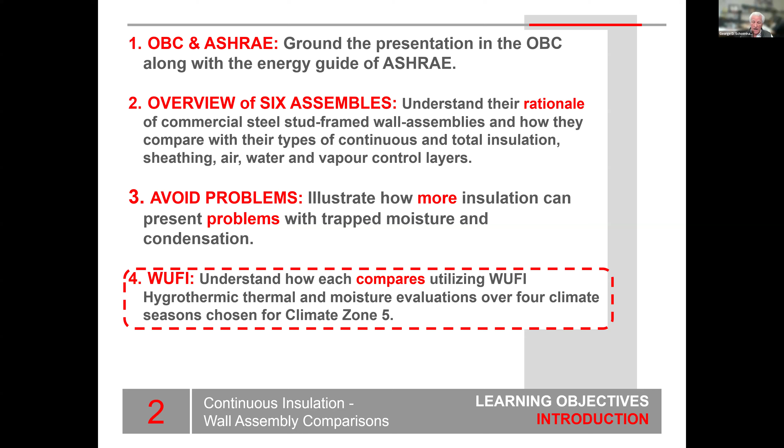We're going to talk about how to avoid some problems. Sometimes putting more insulation can actually become a problem because it traps moisture and it traps condensation, or it creates condensation where you don't want it. And then we're going to take a look at some WUFI models that we did a few years ago comparing the hygrothermic characteristics of the 6 wall types. And they are designed for climate zone 5, which happens to be Toronto.

So with that, here are the 6 walls. And we will come back to this particular view multiple times. So as you see this slide pop up, it'll kind of be the introduction into the next section.

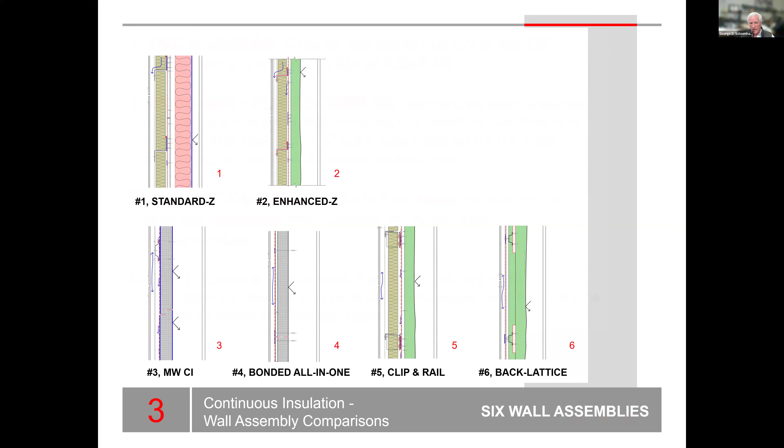So in order to do the comparison, I had to come up with the rules of the game, and figure out what are we comparing to. So here are the rules.

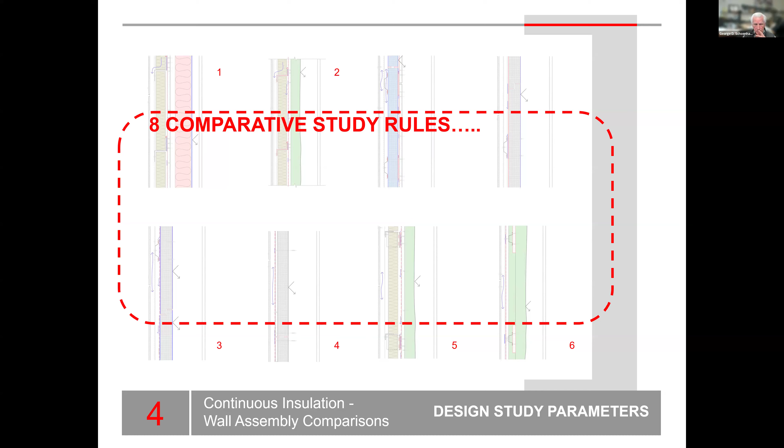We're going to be working with OBC. We're non-combustible, use group C, which could be other use groups, but for this exercise it's use group C, which happens to be residential, and we're sprinklered.

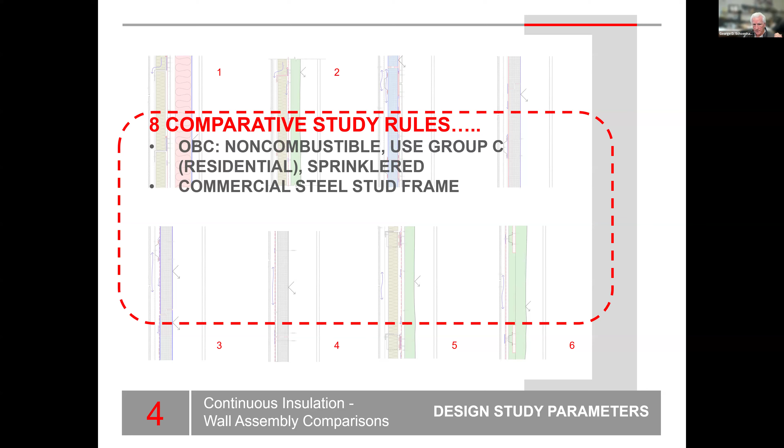We're commercial steel stud. The cladding, and this is interesting, the cladding is independent - that means left, right, independent of where the studs are. So basically where you attach the cladding is not dependent upon where the structural stud is behind it.

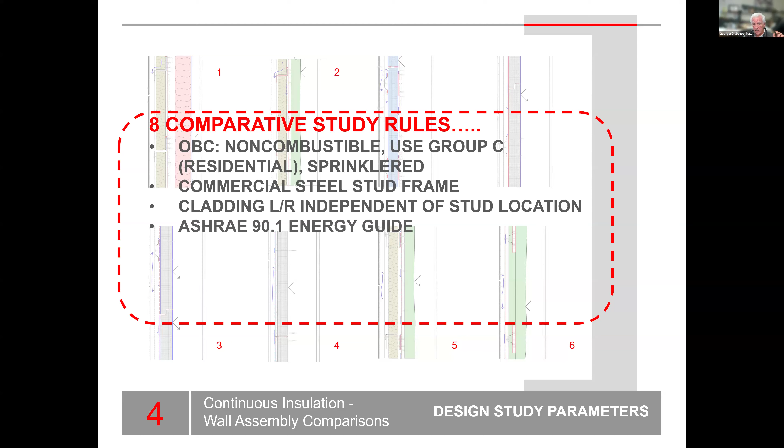We're going to be using ASHRAE 90.1 as our energy guide. We're going to be using climate zone 5. The reason for that is climate zone 5 is the first climate zone that requires vapor control. Any zones less than that are too warm and don't require vapor control. So everything within Canada requires vapor control.

And for the outdoor cladding, we're using 1/4 inch fiber cement. And for the inside, we're using mold resistant drywall.

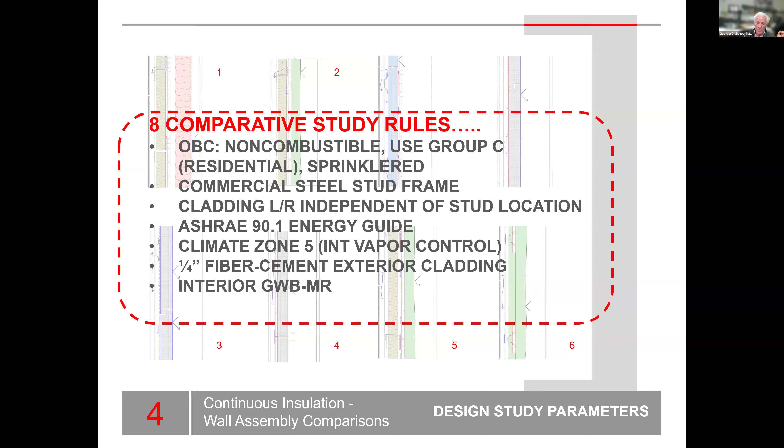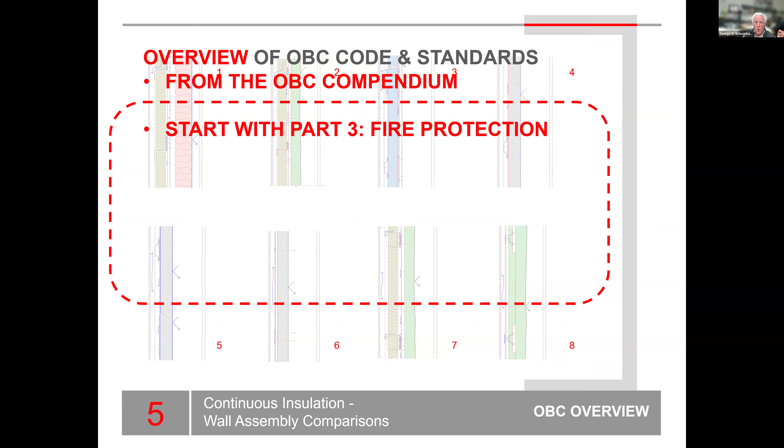Now, from the overview, we're going to take a look at the OBC and only those particular categories and sections of the code that are relevant to what we're working on here. We're going to start by looking at part 3, which is fire protection, and these are the categories we'll be looking at quickly as we go through. Then after that, we're going to take a look at part 5, environmental separation.

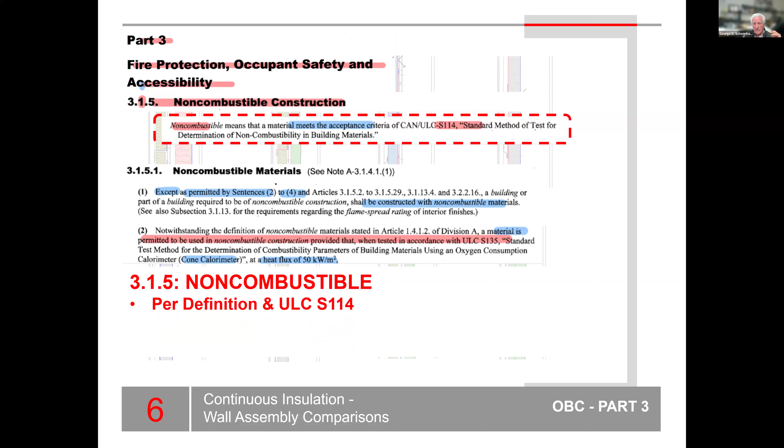So for non-combustible, we better understand what is non-combustible. Well, there is a definition for it, but the definition also relates back to what are the testing standards, because that really is what determines whether it's flammable or not, or whether it's combustible or not. So in terms of combustibility, you're using the S114 test, and then there's another set of tests that uses the S135, which is the cone calorimeter. So this basically tells you whether or not it's combustible or non-combustible.

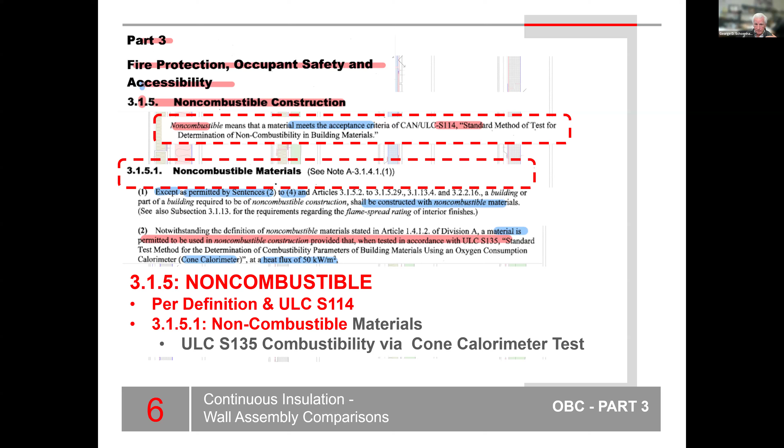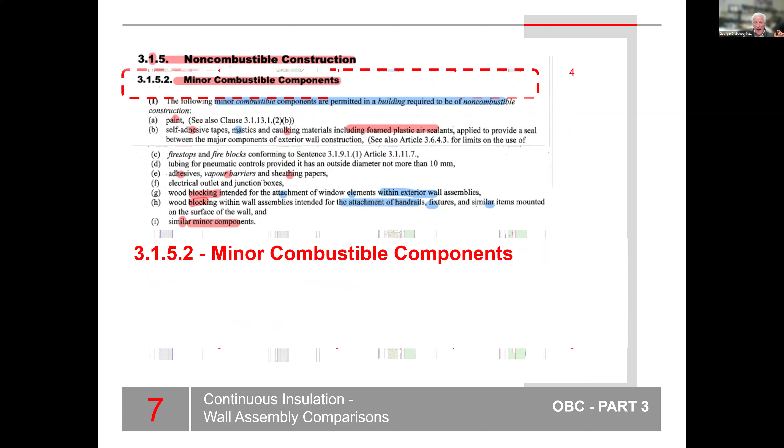Now, with that, there are certain numbers of things that are allowed even within non-combustible construction. There's a little caveat there - certain aspects of it, I call it minor combustibles, and the code refers to it as minor combustibles, that are allowed. And that is very helpful because there are certain things you just plain need to be able to do.

So for instance, the spray foam sealant that goes around the window, that's excluded. The caulk, that's excluded. The air and vapor barrier - they call them sheathing papers in this particular section - the vapor barriers are allowed. I like to try to keep those membranes below flame spread 25. And then also the wood blocking is allowed to be technically combustible in the non-combustible construction.

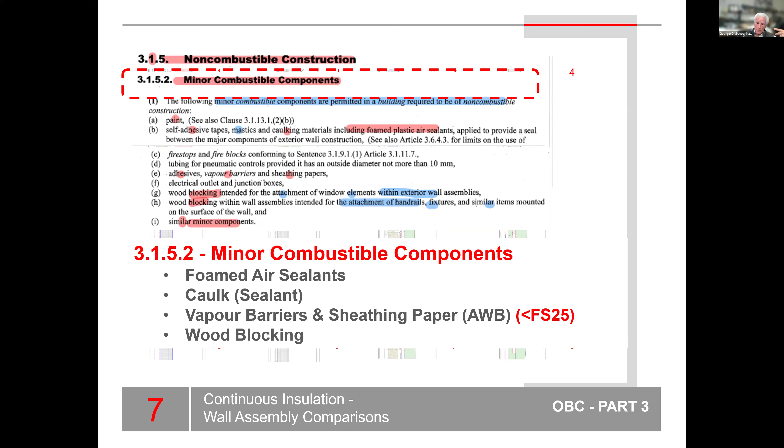Now we're going to get into the first section here, because we do have foam plastic as some of our wall types. Well, what is the issue with foam plastic? We have to keep in mind, yes, it is permitted. Now they said it's okay if it's under a flame spread of 500. That's really high. At this point, you can buy the foam easily within a flame spread of 25. So you want to try to bring that down as far as you can - the higher it is, the more flammable it is. So anyway, flame spread 25.

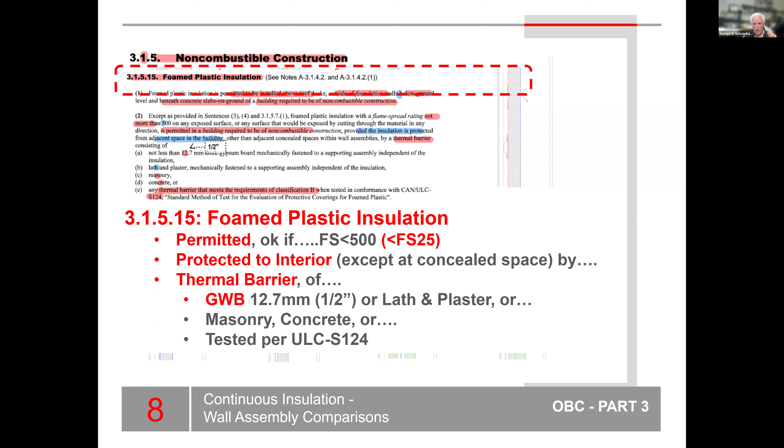But it is permitted. The other thing is it needs to be protected to the interior, except if it's up in like an attic space or a concealed space. So it needs a thermal barrier to the interior, and typically it's drywall. It could be lath and plaster, but there aren't many folks that do lath and plaster anymore. It also could be masonry or concrete, or it could be through testing - you always have the ability to go through testing. If you have some unusual or alternate arrangement, you can basically prove its viability through testing.

Now, what happens if it is a prefabricated foam panel? They are available, and some of them are quite good, and I've used them on multiple projects. But let's find out, what are the requirements for that? Well, number one, it says if you're going to use it, the building needs to be sprinklered.

These have to have a flame spread of less than 500. Again, I think that's extremely high. Keep it down, flame spread 25. Building has to be less than 18 meters.

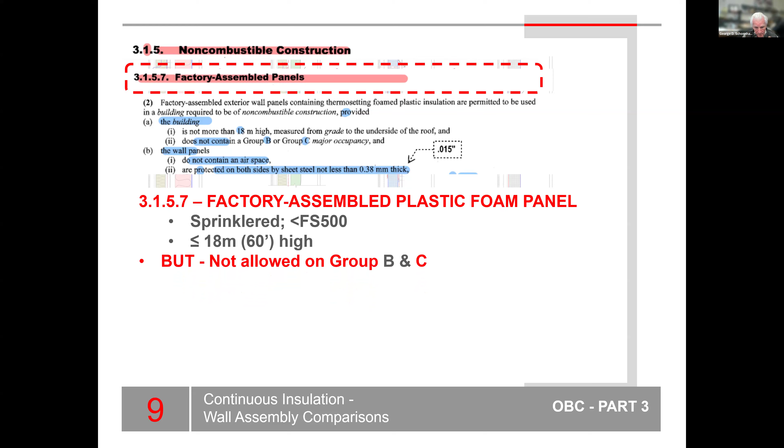But it's not allowed in use groups B or C. Well, I happen to have chosen that this exercise is going to be done in use group C, residential. So thus, I can't use the prefabricated plastic foam panels, but there is a way around that. Now, they also say there's not supposed to be an airspace, sheet metal facing on both sides, tested per 138. But we are allowed to use a mineral fiber core panel, and those are very nice, and that's what we're going to use in our exercise.

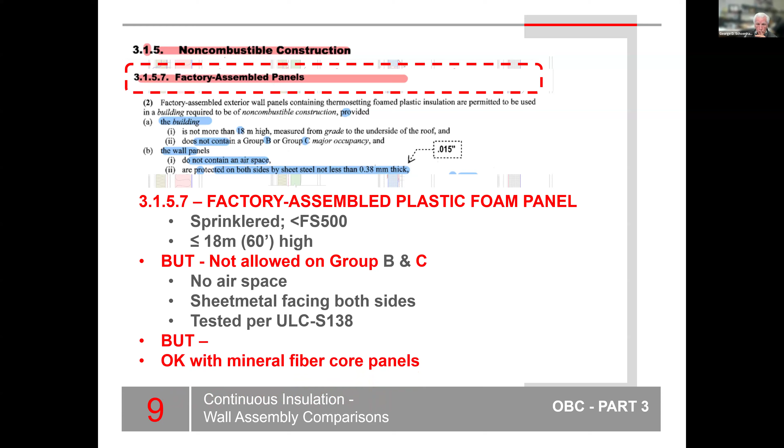Now, this is a really handy chart, and so I really like this section. You learn a lot of information of what you need to do in this. So we are looking at this one particular area in group C, which is the residential. And we are allowed group C, any height, any area. We have to sprinkler.

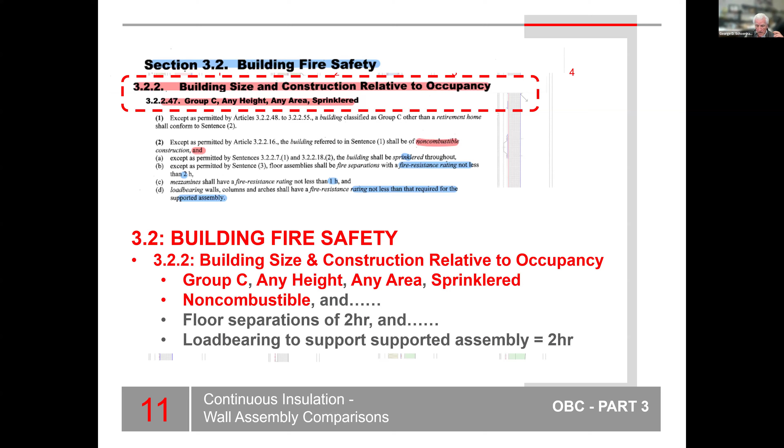And it requires non-combustible. Now, if we were smaller or lower, we could be in wood frame or heavy timber, but we're not. We're purposely, for this exercise, bigger, so we need to be non-combustible. There need to be floor separations and load bearing. Where there's load bearing, it needs to support the supported assembly. Those are structural issues and fire rating issues.

Now, what happens if we put a foam panel on the outward side of the sheathing? Let's think about that one.

Well, first, the code is going to say, all right, you're allowed to put foam on the outside of the sheathing, but only if you're allowed to have a certain number of unprotected openings, which means if you're right up against a property line, they're not going to want you to be putting foam plastic on the outside of the building.

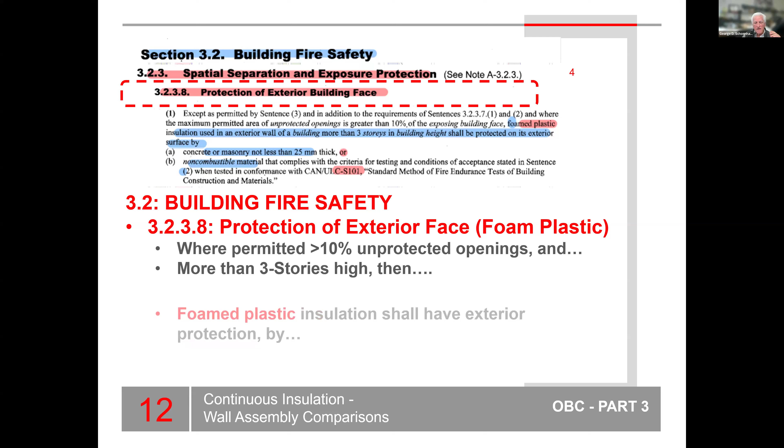So that's the one item. If you are more than 3 stories high, then obviously if you're less than 3 stories, you have some more flexibility. If you're over the 3 stories, foam plastic shall have exterior protection. All right, so now you're going to have to put something in front of it to protect it. You're going to have to be either put concrete or masonry. So yeah, that makes sense. You can put rigid foam like in a brick cavity, and you can put brick on the outside. That's done all the time.

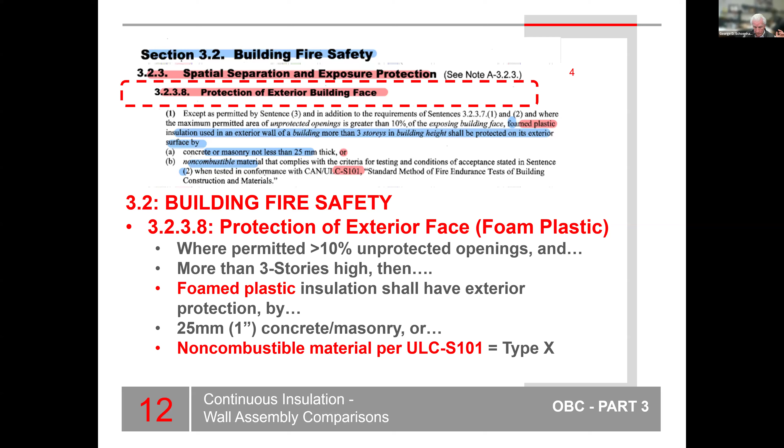Or you can put a non-combustible material on the outer side of that plastic foam. So effectively, the sheathing is going to act as that outer protection. So effectively, what the code is saying is don't put the plastic foam on the outward side of the sheathing if you don't have something that is more like, for instance, masonry or concrete outward of that. So you can't just have foam there and go ahead and put the 1/4 inch fiber cement board in front of it. Not allowed. So that's important because that affects our wall designs here.

Now we're going to talk about environmental separation. What are the energy code? What are the R values and the U factors? Well, it works a little differently in the Ontario codes. They go off of climatic loads, which is out of the SB1, via calculations.

That's a little different than what I'm used to. I'm used to looking at a chart and it tells you what the R's and U's are. So, but they also say you can use good engineering practice. I like that. And they refer to the ASHRAE handbooks. Good. Out of the ASHRAE handbooks, they refer to the ASHRAE 90.1, which is the Energy Design Guide.

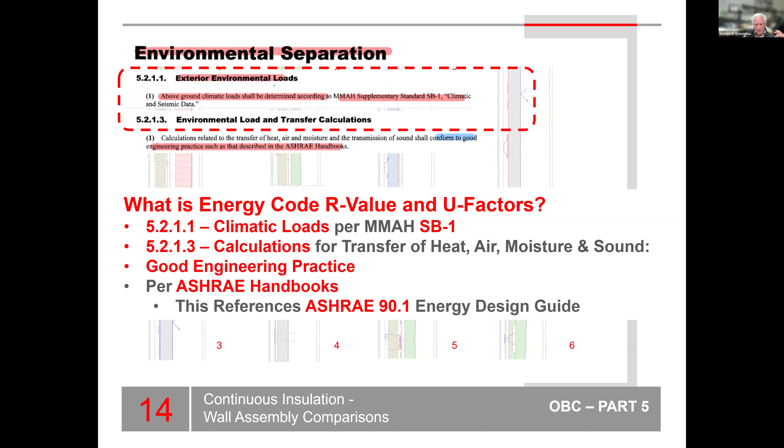So let's move on. The OBC requires an air barrier. Air barrier is basically what an air and weather barrier is, AWB, air and weather barrier. Also, the W could stand for water resistant barrier. Sometimes in the field, everybody calls it AVB, AVB. It's easier to say, but it's absolutely wrong. You are not trying to get an air and vapor barrier on the outboard side of the wall. So it's AWB.

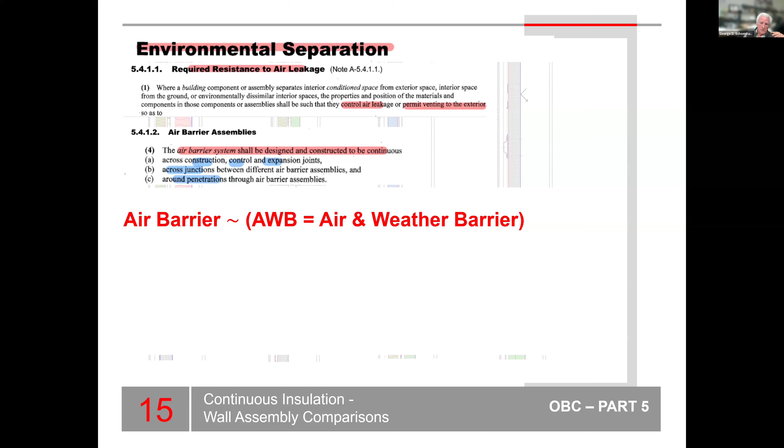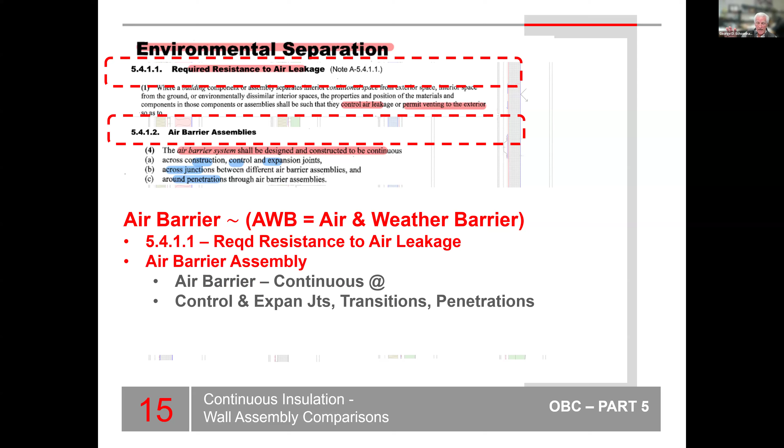Now, what is the purpose of the air barrier? It's basically to slow down air leakage, and you're allowed to use it in the assembly. It could be a material, it could be the assembly, it could be the type of material it is. It needs to be continuous, including the control joints, the expansion joints, the transitions, the penetrations. So it isn't just the coating, it isn't just the membrane, it's the linkages between things.

And at this level of construction, we're talking about a class 1, which is 0.06.

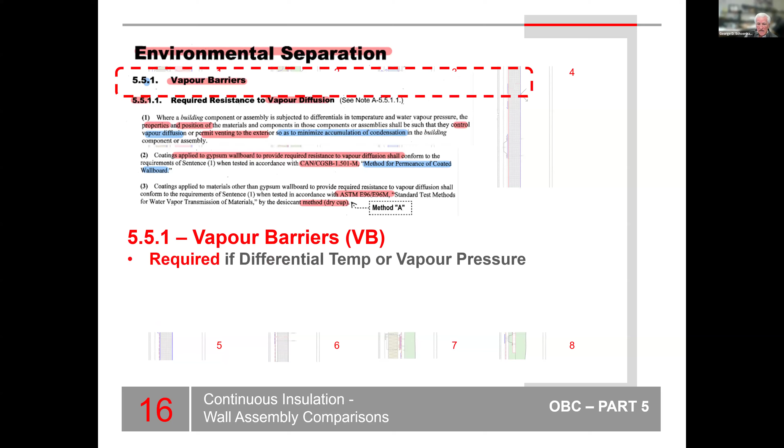Now, we also require vapor barriers. If we have a differential temperature or a differential vapor pressure, well, there's nowhere in Ontario you're not going to get a differential temperature or a differential vapor pressure, unless you happen to be, I guess, an open building or an unheated building. But typically, for the most part, everything we do is going to require a vapor barrier. So we're controlling the vapor diffusion. And I don't like the 'or' in there - I like the diffusion, but also you need to be able to allow the venting once the vaporization needs to continue in the outward direction.

Now, I do really like here that they talk about minimizing the accumulation of condensation. They're accepting the fact that in certain weather conditions, it could be just hellaciously cold - you're going to get some temporary condensation, but we want to make sure it's temporary. It has a way to vaporize, it has a way to get out, and it has a way not to destroy the materials on a long-term basis.

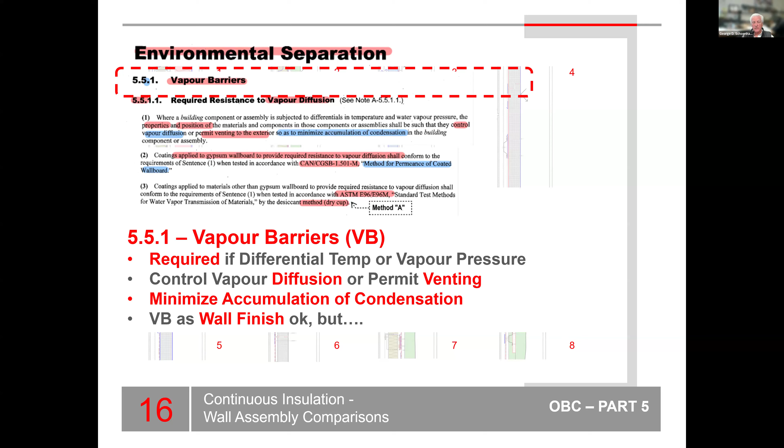Now, they also say it's okay if you use the interior wall finish. Problem with that is it's not always there. People start hanging pictures on the walls, you cut in an electrical box, in which case it's not always ideal in terms of that interior vapor.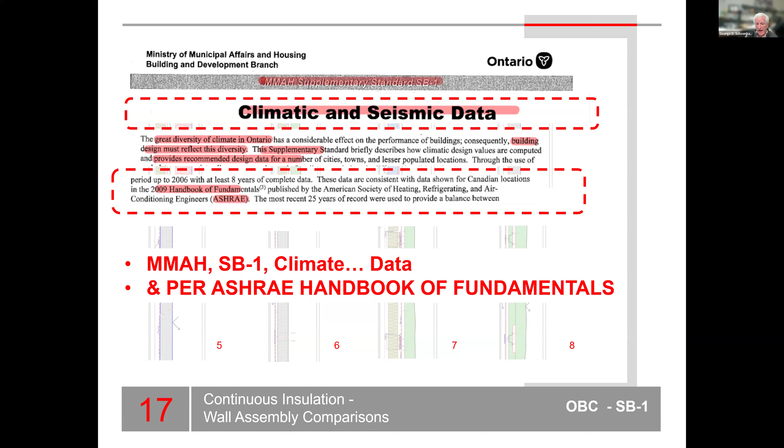Now, this is where the climatic conditions come from - it's out of the SB1. Now, SB1 also refers to the ASHRAE handbook. So we go to the ASHRAE handbook. The ASHRAE handbook says good engineering practice, fundamentals, and it refers to the ASHRAE 90.1. So again, here we are, we're back to the 90.1, which is frankly what I'm used to using.

Now, a few other items here, and then we're going to get right into our wall types.

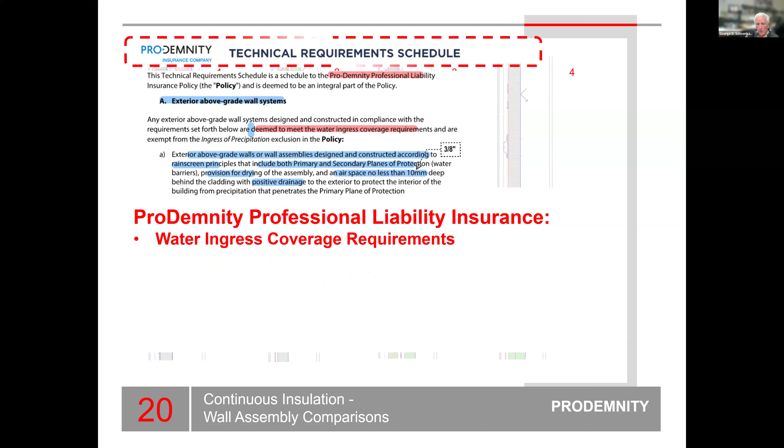Prodemnity, if you happen to be insured through them, have made it very clear that they are not insuring water ingress unless you've made some provisions for it - it's the water ingress coverage requirements. Basically, they need you to be designing rain screen principles using a primary and secondary plane of protection, which is what we're doing in all of these designs, making sure that it can dry and making sure there's at least a 3/8 inch airspace in there and positive drainage, so that when there is condensation, it's able to come down, be captured, and then drained out. All of that is excellent, so let's just keep that in mind.

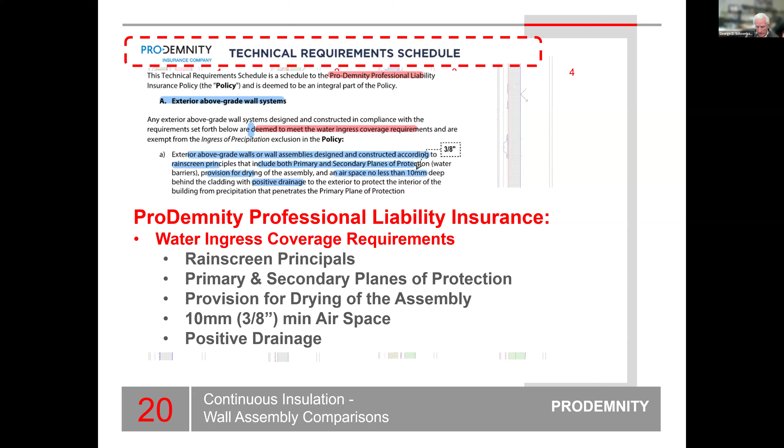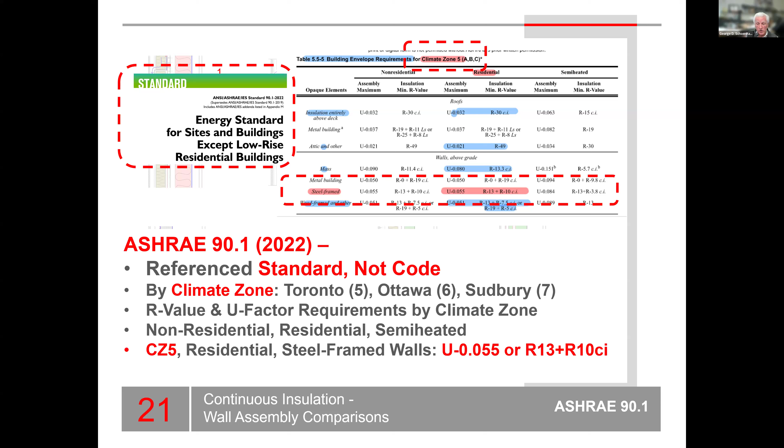So in climate zone 5, under this particular code, which is - well, this happens to be 2022, this is like the brand newest one - it's an assembly U value of 0.055. Or you can do prescriptive, which means you just add up the insulation layers, but you're not able to use the air films and the air spaces and those kinds of things. Just prescriptive, which is R13 plus 10, which means 13 between stud, 10 is your continuous insulation.

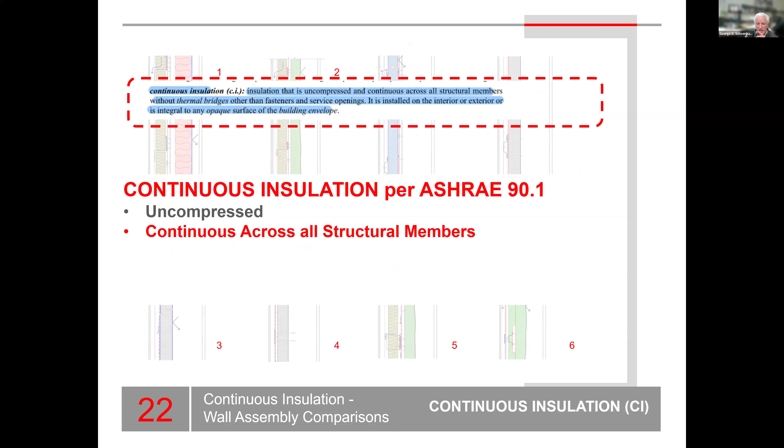Now, what is continuous insulation? 90.1 has a definition for that: it's uncompressed, it's continuous across all structural members, so it's not starting and stopping for the studs. It's keep on going, it's without thermal bridges. And there's a few caveats there, other than fasteners and service openings - so you're allowed to have the fasteners that hold the wall together.

And the continuous insulation can be either located on the interior of the wall - I'm not sure I would do that, but anyway - the interior of the wall, the exterior of the wall, or somehow integral to it. We'll talk about that a little bit.

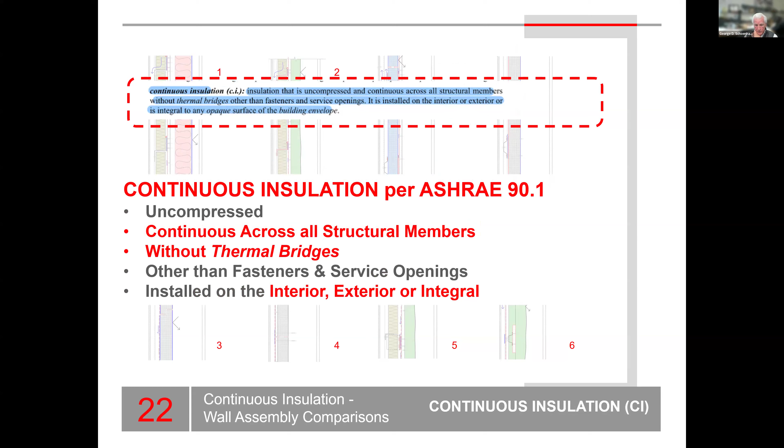Now, the other thing - well, because back here they said without thermal bridges, continuous insulation without thermal bridges - all right, what is a thermal bridge? Thermal bridge basically is the path of least resistance for energy. If it can't get through the insulation and there happens to be a spot that allows faster transfer, boom, that energy is going through there. So that's what we're looking for - that ends up becoming the bridge. The bridge is like, all right, it's a little path and the energy is going through that thing.

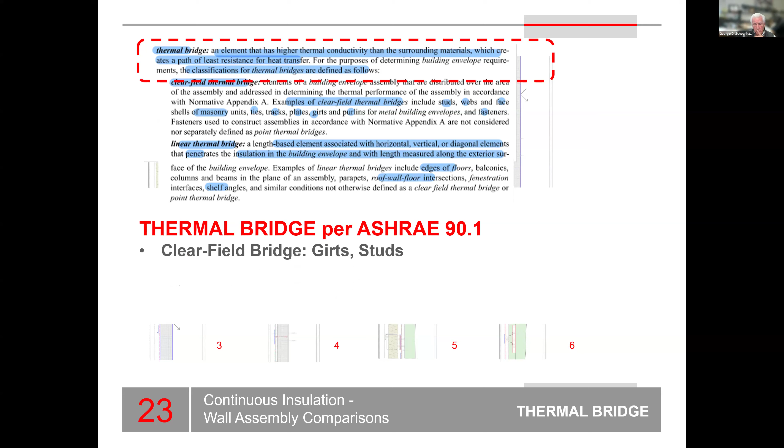Now, the clear-field bridge, that is basically saying the studs and the girts, they're calculating that in the efficiency standards of the insulation. So for instance, when you look up batt insulation in a steel stud wall, depending upon what the spacing is, you're either 40 to 60% efficient. So basically they're deducting the energy loss that's going through the steel. That's if you're using the U factor approach, and that is captured in the efficiency factors.

Fasteners are excluded. Linear thermal bridges, you need to be sensitive to those. Those are slab edges, those are the shelf angles that hold the brick up.

Now let's go look at the R's and the U's. Toronto, as I said, is 5. Ottawa, 6. Sudbury, 7. I originally designed this under IECC 18, so it has a slightly lower R factor than what it is currently right now, because it was just a couple of years ago, but things are always changing. We're also going to look at this with ASHRAE 2019, and then also we're going to look at the high performance, which is ASHRAE 189.

So this was originally designed when the insulation was 7.5, the continuous insulation in climate zone 5. That now has been increased to 10. Notice the between-studs value stays the same; it's the continuous insulation that increases. Climate zone 6, Ottawa, that goes up to 12.5. Sudbury goes up to 15.6.

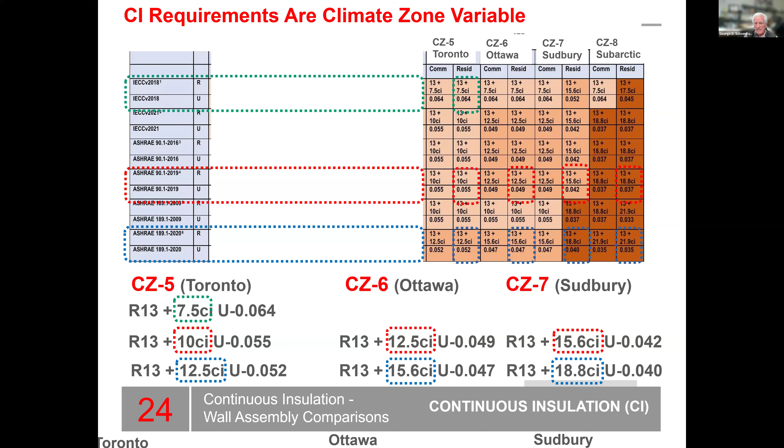If we use high performance, it starts out at 12.5, goes to 15, goes up to 18.8. So what's changing in all of these is the value of the continuous insulation. That is where the most efficiency is, number one, it's like 100% efficient, and that's where the best energy efficiency is in order to make these walls perform.

Now let's get started with our 6 walls. We're going to start with what I call the typical Z. Typical Z is basically steel studs, and you're able to calculate this with the prescriptive method, which is basically there's insulation between the studs, and there is mineral wool on the outward side of the sheathing.

Now what are the strengths of this? It uses common materials, they're easily available. There's nothing special order here. It encloses very quickly, so the wall can be made watertight very quickly. It's free of the 134 requirements, which means it doesn't require special fire testing.

Now what are some of our challenges? Well, in my opinion, there is thermal bridging here. That galvanized steel Z cutting through the mineral wool, to me, looks like a thermal bridge, because the back leg of that Z is effectively touching the leg of the stud, except for a little bit of insulation value from the gypsum sheathing. So it's not ideal, but this is an arrangement that's done fairly often, and it always drives me crazy when I see it because I'm worried about those galvanized Z's sitting there.

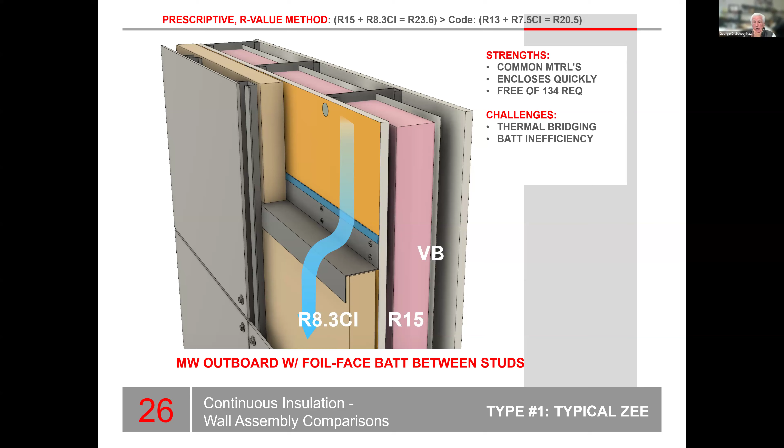There also is batt inefficiency. That insulation sitting between the steel studs, you're losing a lot of efficiency when it's in that arrangement. There are condensation risks because moisture can basically get trapped, or dew point can occur within the body of that insulation, in which case it will actually condense on the inward or cavity side of the gypsum sheathing or on the side walls of the studs. So there are condensation risks, and we'll see some of that when we look at WUFI.

Now there's also an issue that the semi-rigid mineral wool on the outward side is great as long as it stays dry, but when there's condensation that occurs, or when there's water leaking through the rain screen - a rain screen is not 100% waterproof, there's about 5% water that can get through it - there's a little water back there. And in the summertime, there can be condensation that occurs back there. So there are opportunities for that insulation to get a little damp.

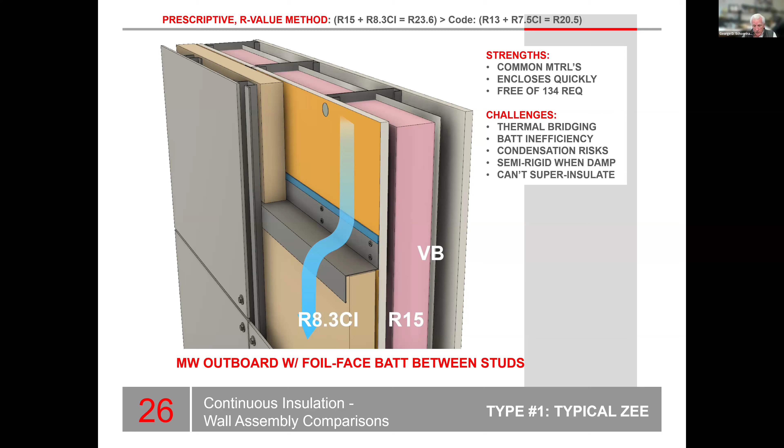Now the other problem is you can't super insulate the batt insulation. At a certain point it's just too thick. You don't get enough temperature drop across that insulation in order to help drive the moisture out, so it just kind of sits there. It's like having too many blankets on - it actually becomes a problem. Now here's an improvement on this.

We're still able to go prescriptive here because we have between-stud insulation and continuous insulation. But this is different because we use a composite Z, made out of a few materials. Sometimes it's fiberglass, I refer to it as a composite Z.

Also, it uses spray foam, and in this case closed cell spray foam, which is the best way to go because the closed cell acts as the vapor barrier. There is no bridging. That composite Z is actually more energy efficient than the insulation on either side of it, so the Z, because it's composite, is not acting as a thermal bridge.

And the spray foam is controlling vapor movement in both directions. In the summertime, it's controlling vapor movement trying to work its way in towards the air conditioning. And in the wintertime, it's controlling vapor movement on its way out towards the cold, dry air outside.

You can super insulate—not a whole lot, but you can insulate to the point where you make sure the dew point occurs within the body of the rigid insulation. And because the rigid insulation is closed cell, you're not going to get water particles occurring at that point because moisture can't get there. So the temperature's there, but the moisture's not there.

Now we're going to go into wall type 3. This is the one that was a real challenge. Now you have to calculate this off of U. It doesn't follow the prescriptive method anymore because effectively all the insulation is outboard of the structural stud. It also says that panel is the outward sheathing. The panel is the sheathing.

Well, we can't use XPS, that's out. Now, it would be protected to the inside, but it's not protected to the outside. Can't use phenolic, not allowed in Ontario. Can't use phenolic. Foil-faced ISO? No. Why? Well, number one, we couldn't use it because we chose to work under residential.

So now what we can do is we can use tongue and groove formed mineral wool panel. That is a product, it is manufactured. Tongue and groove, the panels come together very nicely. Another nice thing is there's a metal facing on both the inside and the outside. That acts as a vapor barrier.

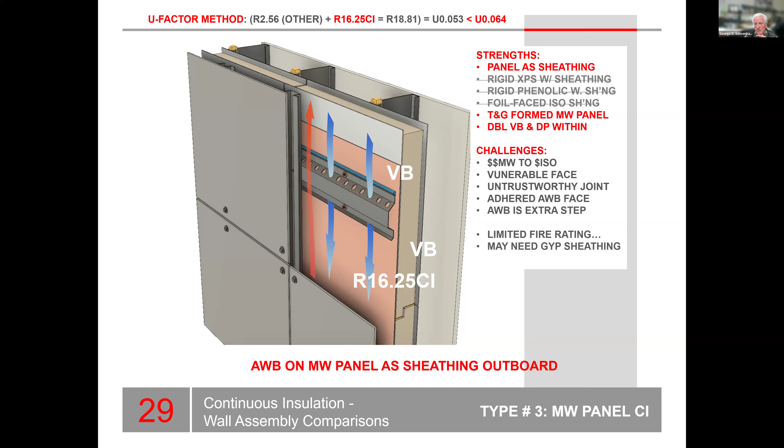And it's all 100% outward insulation. Super efficient, goes up fast. It manages the vapor movement through it in both directions because the urethane foam is closed cell, so it's not letting moisture through it either way. And what's nice about this is you can do quality control before you ever put the cladding on, so basically the building is buttoned up and watertight before that cladding ever goes up there.

And you can also get some fire rating options. You may have to add another layer, a layer of sheathing behind the board up against the studs, and that's typically the route that's done in that case. Also, it can be prefabricated.

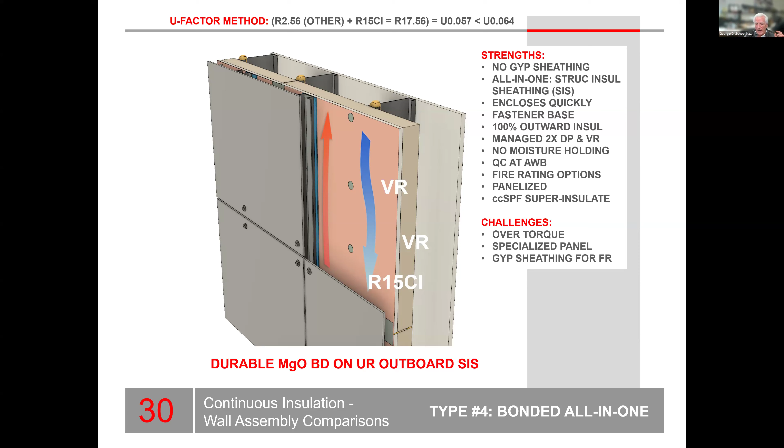It is a specialized panel. This isn't just readily available. And you may have to put some gyp sheathing in behind it in order to increase your fire ratings.

Here's our next poll question. Shalika, here we go, I will read them. Now, the sheathing is not needed to the exterior of foam - that's the first. Next one is, a mineral wool clad panel with only outward metal facing is okay. Next one is, extra air and weather barrier on prefab panel is advisable. Next one is, fastener base holds just like plywood. What do you think?

Sheathing not needed to the exterior of foam - depends if you're a low-rise building or not. What we were doing is we were going up higher, non-combustible construction, residential. And in our case, we did need to put some kind of sheathing or non-combustible material to the outward side of that foam.

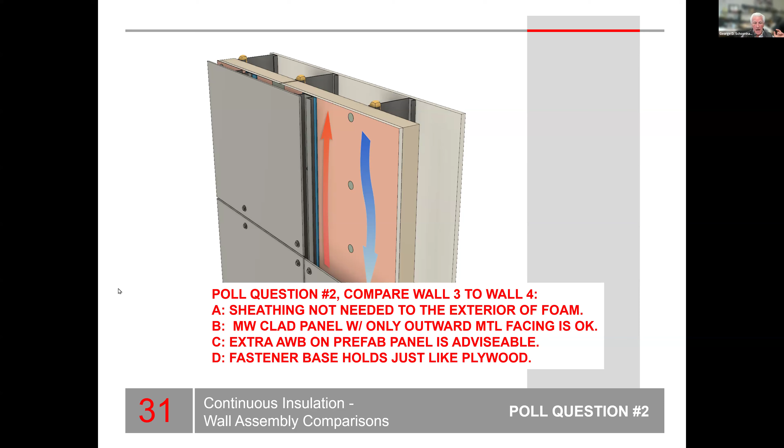Here we go, now we're into the last two. This one is done often on institutional projects. It's clip and rail - it's basically where the gyp goes on, the sheathing goes on the outside. There's either spray foam - in this case, there's spray foam on the back side of it - or you could put some batt insulation in there. The air and weather barrier is on the face of the sheathing. Then there's a clip and rail system.

Then there's mineral wool that's out there, and it has all sorts of fire rating possibilities. It easily can be a 1 hour wall, a 2 hour wall. It also has flexibilities in terms of the weight of the cladding systems. So if you're going to put a stone panel on, this often is the system that's used with that. There are a lot of steps, though, in the construction of this.

And in the summertime, there's active condensation out there. That metal is collecting condensation. And so you have to make sure that you're sealing the fastener holes and the attachment plates, because we don't want water hanging out right up against the air and weather barrier. The air and weather barrier is meant to allow water to move past it. It's not waterproofing, it's not meant to just sit there and hold water right up against it.

There is moisture holding. Where that mineral wool touches all these metal components, there's the possibility that the fibers are going to collect water right there. And it's multi-step construction - there are a lot of steps that get moved that have to happen in order to try to build this wall.

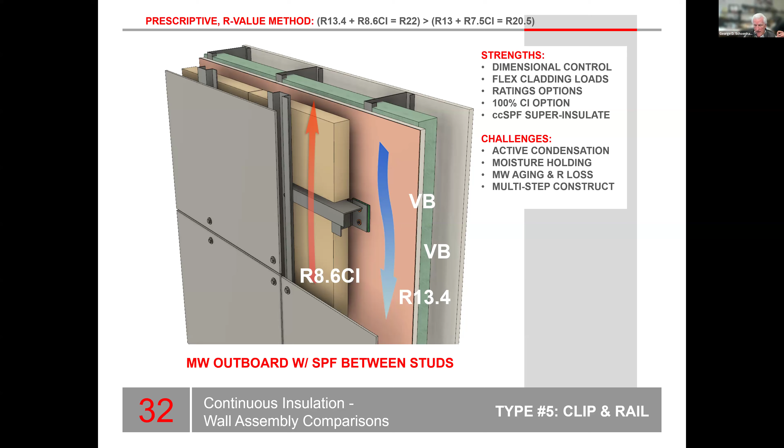Now here's the last one. It's called back lattice or back crisscross. This is basically where the insulation is inward of the sheathing, but it's also outward of the structure. It's accomplished by coming up with a crisscross framing between the studs vertically and crisscross the other direction. In this particular case, it does use common materials.

There's a framing lattice, so you have to build this crisscross frame. Once you build the crisscross frame, there's a thermal break in this particular design.

There's a little thermal transmission pad that goes between the horizontal and the vertical, which is that beige colored little block there. That's not a piece of plywood, it's a piece of rigid foam, very high density rigid foam.

This works very well with two-directional moisture flow because it's using closed cell foam, so there's no moisture holding in it. The quality control is done at the outer side. This is called a naked wall, meaning all that insulation is inward of the sheathing. Once that sheathing goes on and it's sealed and sealed to the windows, you have a watertight wall, and you can do your quality control testing at that point.

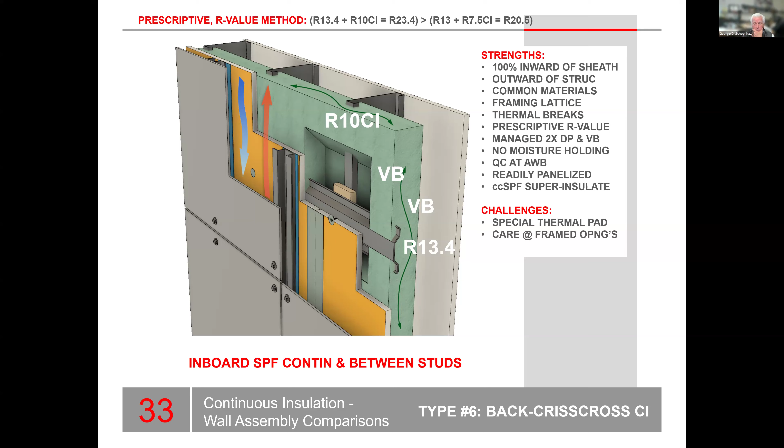It does require that special thermal pad, and you have to be careful at the framed openings—take some extra framing and a little extra protection at your window openings.

Now let's look at the WUFIs. We're in our last section here, and again we are right on time. What we're looking at in WUFI is the red line, which is the temperature. You can see it basically starts from the inside where it's warmer and goes to the outside where it's colder. We did four seasons: early January, middle of March, early July, and early October. This is for climate zone 5, so it would be Toronto.

What we're looking at is wall type 1, which has batt insulation between the studs, sheathing, mineral wool on the outward side with the horizontal Z-girts, galvanized Z-girts. So let's look at this.

Where the temperature comes down to the point where it meets the dew point temperature, and they happen to touch—right there is the location where condensation can occur, if it happens to be on a material that will support the change of state, basically between vapor and liquid. So it's not going to occur out in the middle of the puffy insulation; it's going to occur when it's either on the sheathing or on the metal stud, where that energy transfer happens, and that's where the little particles of water occur.

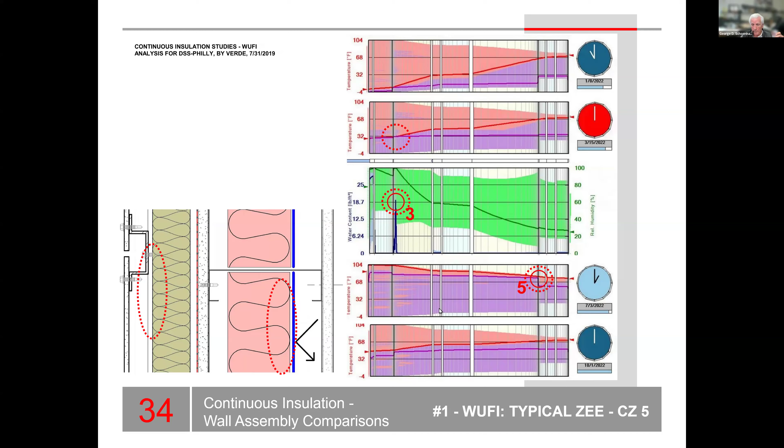Let's go look at the next one. This is where we have the spray foam on the backside of the sheathing. We still have the same mineral wool on the outside, but now we have that fiberglass Z-girt occurring there. Let's look in January. These things never touch at all.

No issues there. March, very nice, all the way through. Now where are we at? That's March. July. From here to here is July.

This is when moisture is now starting to vapor flow towards the inside. Right at that gypsum panel and the air barrier, there is some moisture occurring. There's condensation occurring at the air and weather barrier. Yes, it builds up a little bit, but here's the point: it doesn't linger there long.

The other point is that we need to make sure you're using a vapor permeable air and weather barrier. You do not put a vapor barrier, or a vapor barrier type air barrier, on the outward side, so that when that moisture is there, it has a chance to vaporize. Next time the sun comes out and warms up the wall, the vapor goes out.

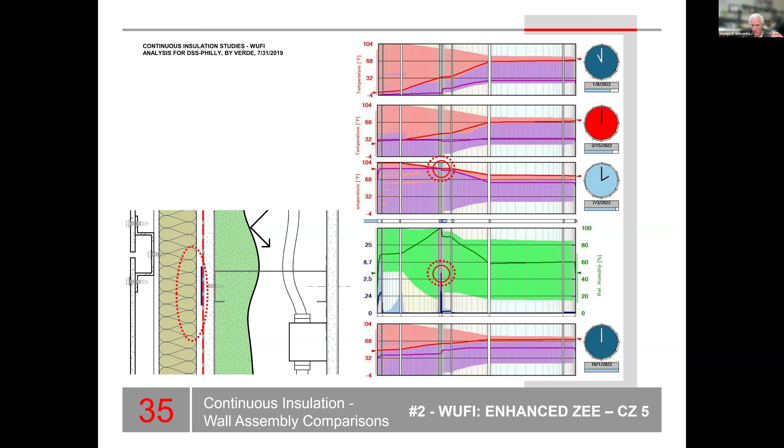Oh, we're into a poll question. Okay, this is our last poll question. Foil-faced batt in July shows high risk. Next one: spike in moisture at sheathing means use a vapor barrier air barrier. Next one: spike in moisture at outward mineral wool is no issue. Next one: dew point inward of the air and weather barrier is okay. What do you think?

Foil-faced batt in July shows high risk. Yes, it does show high risk, because the moisture is trying to drive its way in. With that, it's warm outside and cool inside, air conditioned inside, so the humidity, the vapor density, is down. So the vapor drive is inward. And that's good. Excellent, thank you.

So yes, the foil-faced batt in July does show high risk. Now that's also why if you super insulate the wall with lots and lots of batt insulation, having that moisture there is a challenge, because the next time the sun comes out and tries to warm up the wall, it takes a long time for that heat to get all the way back to the point where it encourages that moisture to vaporize and move out. So it can just linger there. That becomes a problem.

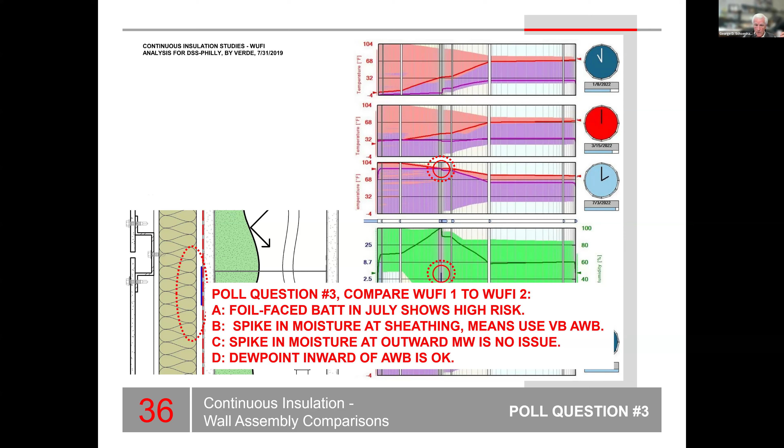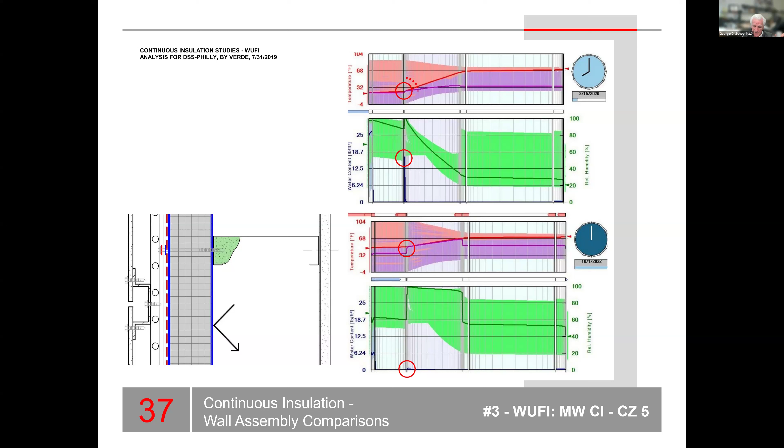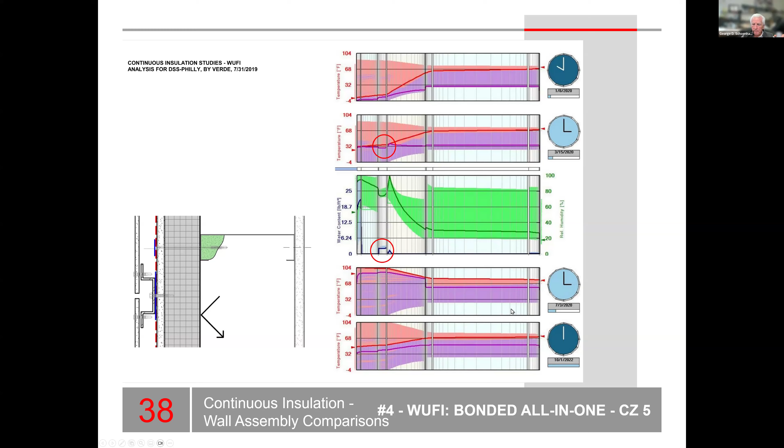So what? It's outward of the air barrier. And what difference does it make? Well, it only makes a difference if there's water that's being trapped or held between the hardware and the air and weather barrier. So make sure that you seal it carefully and also seal the fasteners. You don't want water hanging out there. That's a really bad idea because we don't have waterproofing here. This is an air barrier.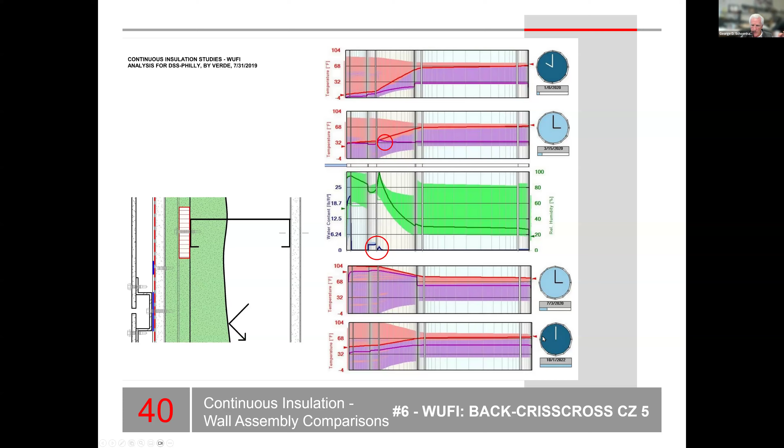Summertime, absolutely no issues. In the fall, absolutely no issues. So it's very efficient from a WUFI point of view as well.

And with that, we are done. By golly, we are right on schedule. And Shalika? Yes, I'm over by 4 minutes. So that's pretty okay, darn good. Perfect timing. Yes, thanks so much, George.

So someone has asked, what do you think is better, concealed fasteners or exposed fasteners on the outside face of the wall? Oh, let's go look at that. And I think by that you can see my answer: exposed fasteners. Now here's the reason.

You can't do a concealed fastener if the panel is only a quarter of an inch. You have to get up to about a 7/16 or a 3/8 — again, this is in inches — in order for you to have a back fastener. That's a more expensive panel. The other problem, when you put the hidden fastener on the backside, you can strip the threads on that. So it's a little risky, particularly hanging those panels up really, really high.

I tend to like an exposed fastener. It also goes up faster. And I do like them, though, to be pre-drilled so that there's a little bit of movement to these panels around the fasteners, because you don't want there to be a thermal stress at the fastener. They do have color capped fasteners. Now, if this is a fancy pants building, in that case you're going to probably want to use a concealed fastener.

In which case then these panels are made ahead of time. There's a cladding track that's used on the back side of it. It's fastened ahead of time. So then you have basically a clip and a rail system, and then you take the panel up and it hooks onto the rail, and then it fastens, or there's a little set screw that fastens down below. You would do that on a building that has a higher budget, and that would be typical in that case.

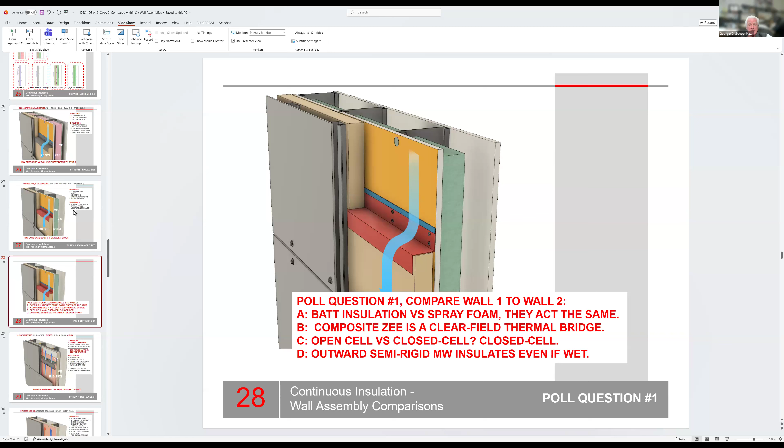So if we're looking at basically a commodity wall, this and these are commodity walls. This one is with batt, this one is with spray foam, and this one uses the composite Z, and that Z can either go vertically or horizontally. I don't know if that answers the question, but these are the commodity walls. This is my least favorite, as you can probably tell. This one is absolutely reasonable and is very easily accomplished and very successful.

Now, what was the other half, Shalika? What was the other half of that question? Similarly, they were asking, would you say wall 1 and 2 are the worst systems and wall systems 3 to 6 are preferable? I think I just said wall 1 is the least preferable.

Wall 2 is absolutely acceptable. It performs nicely. You do want to make sure in wall 2 that you're keeping the water away from getting trapped behind that back leg. If you put the composite Z on vertically, that issue kind of goes away, but now you have to coordinate that Z with all of the studs. So there's some coordination that has to take place there.

The other ones are more institutional. Now this last one, the back crisscross, this really works well if it's a prefabricated wall, because you're trying to assemble a stud with a horizontal, and the easy way to do that is when you build them horizontally. So you basically build the wall horizontally, flip it up, back spray it, and ship it to the site, or you can spray it when it gets to the site. That works out very nicely as well.

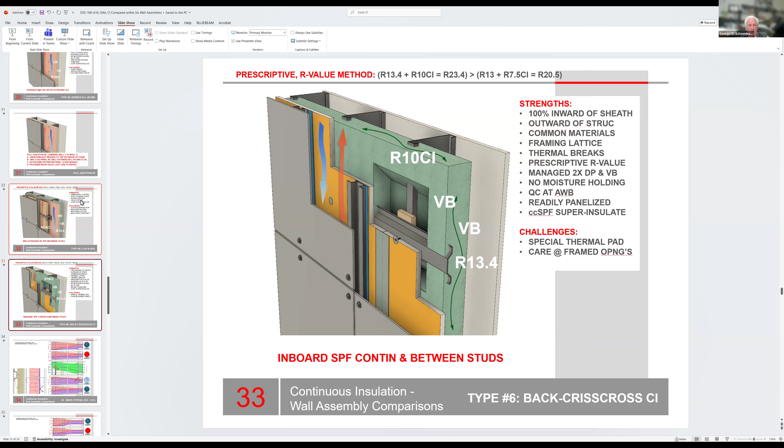Number 5 is definitely institutional, 4 is institutional. 3 is the mineral wool prefabricated panel. That is a more expensive combination by the fact that you have the mineral wool built into a panel, and so it ends up being used for, let's say, a hospital or a medical center, where you absolutely need to make sure that you're non-combustible, non-flammable. You don't want foam anywhere, and it works well for that.

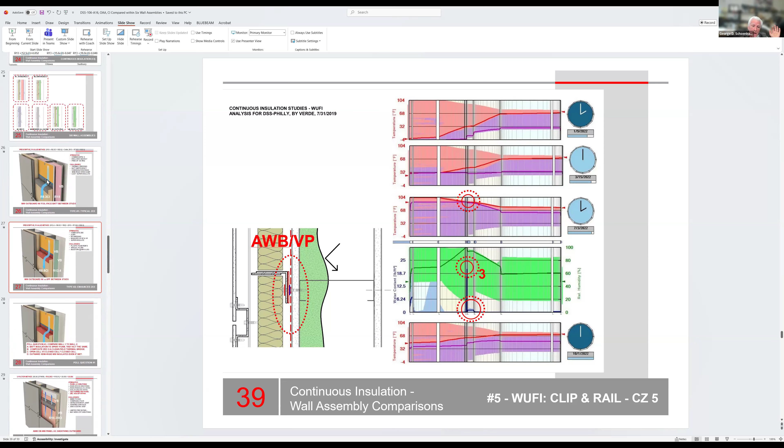Now let's go back to one that's a little different, because this is one that rarely does anybody care about. They just put these galvanized things up, screw them on, and walk away. I was like, oh no.

What happens is moisture collects behind it, like osmosis. There's a tight surface between the back leg and the face of the air and weather barrier, and water loves that—that's where water hangs out. So forever and ever, water is hanging out between these two surfaces, and you've got a screw going through it. The moisture follows the threads of the screw, and it's already broken the air barrier quality at that point. The moisture starts working its way in on those screw threads, and it starts rusting out the screws.

It's a bad arrangement. The better way is this blue line: you put a line of sealant along the top edge of that Z-girt so it keeps moisture from collecting there. The other thing I like in this arrangement is you can get a little neoprene pad, even 1/8 of an inch thick, and put it right where the screw fastener is going to go. It drives through that and helps to seal. It also moves the back leg of the Z away from the sheathing a little bit, so water can slip behind it, which is helpful. You want to avoid areas where things are jammed tight next to one another, because water likes hanging out in those places. A little bead or squirt of sealant before you put things together is really helpful.

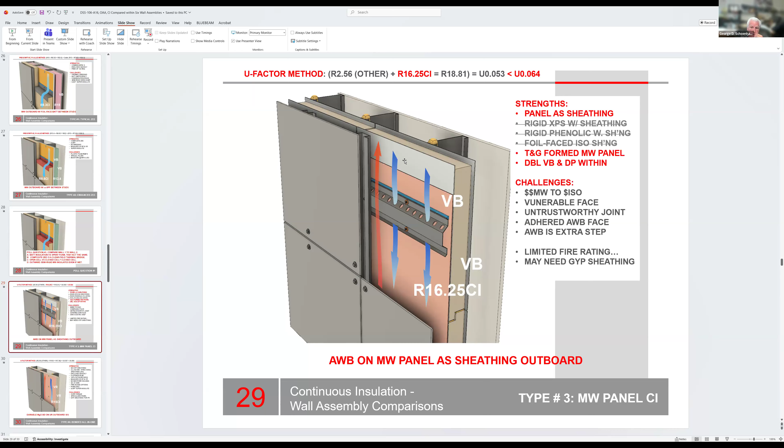So you may have to put better insulation in that wall to hit an hour rating. I do know with these products you can get up to 2 hours—here's magnesium oxide—but you have to put multiple layers of drywall up. Because once that drywall drops, the metal stud is facing the fire. Now it's not going to melt, but it gets hot, and as it gets hot, it loses its structural strength.

So what you're going to do, even if we were using this, is go to that manufacturer and ask for their fire ratings, their rated assemblies. They'll give you a chart with the 134s, which is the fire testing for what happens when there's fire on the outside of the wall coming through an opening—basically vertical and lateral fire propagation. They'll also give you a report like the 101s, which is the fire rating from the inside out. So those things come from the manufacturer.

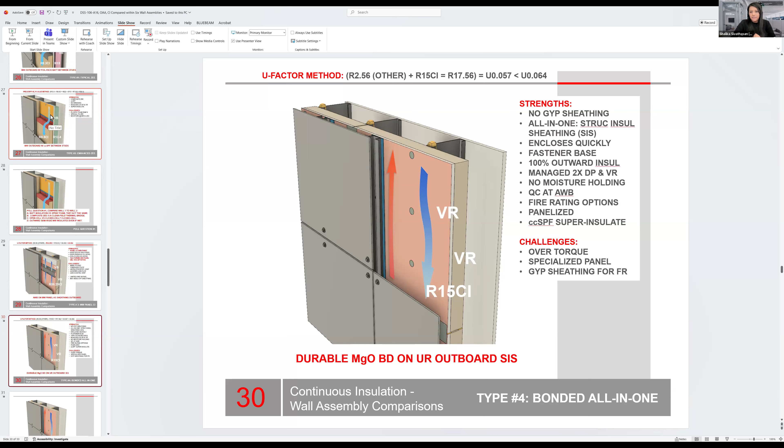Okay, say that one again. Say that statement again. Sorry, I need to get the picture connected.

No problem. So they've asked, what do you think about adding batt insulation, fiberglass, inboard of a 2-inch layer of closed cell SPF in the 6-inch steel stud space? It seems likely that the dew point would be within the SPF insulation layer.

SPF, SBS, what is the S? SPF, they've written? Oh, spray polyurethane foam. SBS is a roofing term. Oh, SPF is spray foam. Okay.

2 inches, well that's basically what this is—about 2 inches of closed cell spray foam. We have done WUFI analyses where we're specifically looking at adding an R13 within this zone, because for this wall to become fire rated, it's 2 layers of gyp here and R13 mineral wool or fiberglass within this cavity. The R13 or R15, there's not enough temperature drop across it for dew point to occur within the batt.

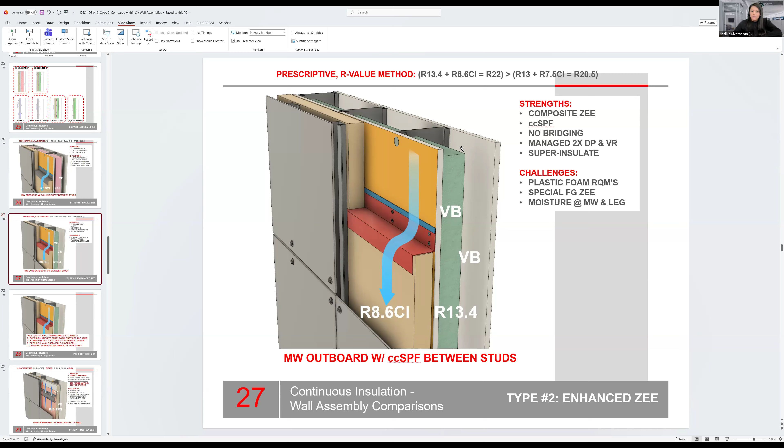Next question: you're showing foil-faced insulation in assembly type number 1. Would you recommend a smart vapor retarder that can permit some drying as opposed to one that is entirely vapor closed?

Yes, but I'm not comfortable that that is truly a wintertime vapor barrier. I know it's used, and I know there are certain building types where using a smart liner like that is fine. I tend to think if there's really going to be a vapor barrier, it needs to be real because there's a reason for it. In the summertime, particularly if you have continuous insulation on the outward side, the dew point is trying to occur out here, not in here. Now if it does occur in here, I guess that's the advantage of having this be more breathable, so it can continue on in.

At this point, I'm more comfortable with a very clear vapor barrier that functions as one. It's a little different though when you're in low-rise residential.